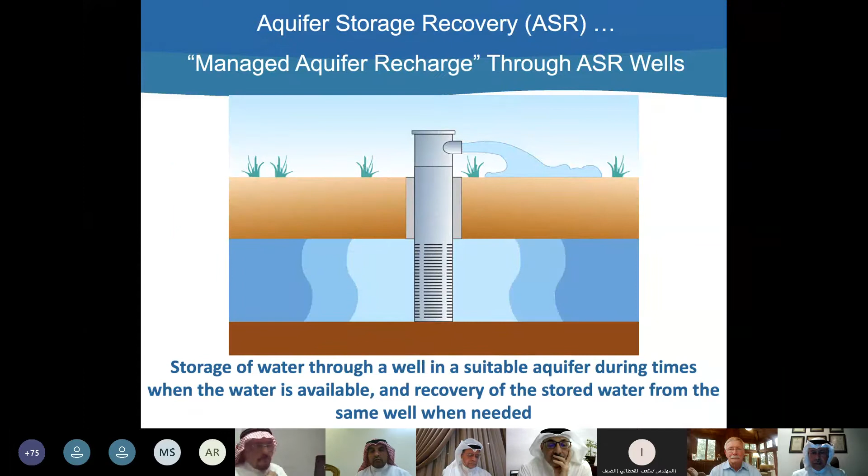Apologies for causing a delay. Not quite sure what happened. Now they're trying to, David, yeah. Yes, now your presentation is there. Okay, David, you can start. David? We can't hear you. Hello, David? David?

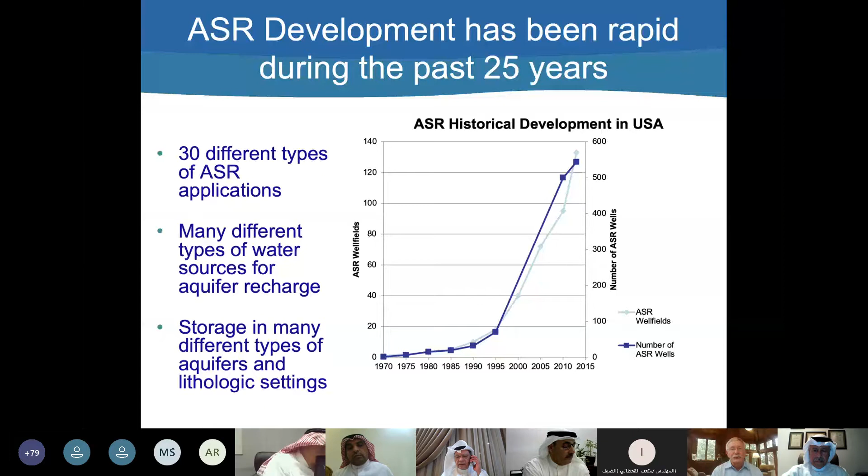So in answer to an earlier question, the pace of ASR development in the United States and around the world has been pretty rapid. You can see the development here over the last 25 years. We've identified over 30 different applications of ASR. We're storing drinking water, reclaimed water, partially treated surface water, and also groundwater from a different aquifer. And we're storing in karst limestone, dolomites, volcanic material, sand and gravel aquifers. We've probably stored water in it. Next slide.

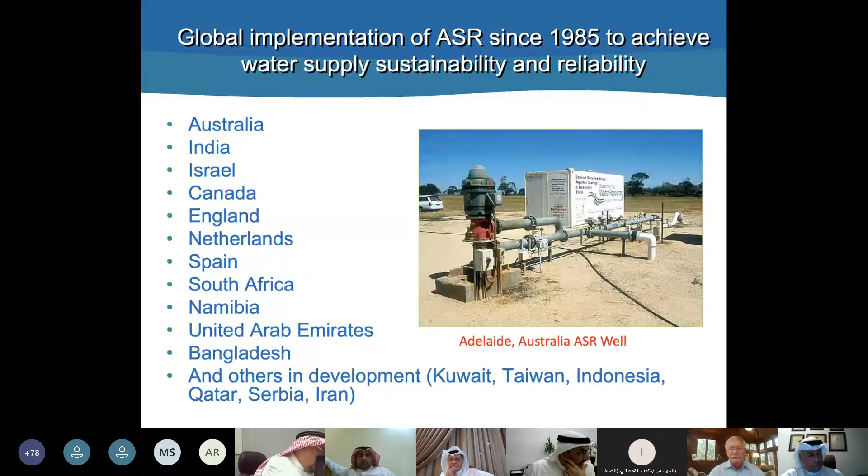It's not just in the United States, it's moved on overseas. So you can see all the countries here that have ASR activity, including in the United Arab Emirates, and others in development right there in Kuwait, and I believe in Qatar and possibly other areas that I'm not familiar with. There's a slide from Adelaide, Australia. Next slide.

So what's driving this? Well, the main driver is economics. Basically, we typically can look at any water supply need or water storage need and develop it with ASR for less than half the cost of alternatives. And in some cases, that cost savings is closer to 90%. We have a lot of different applications of ASR, and it's being applied not just for water supply purposes, but also for environmental and water quality benefits.

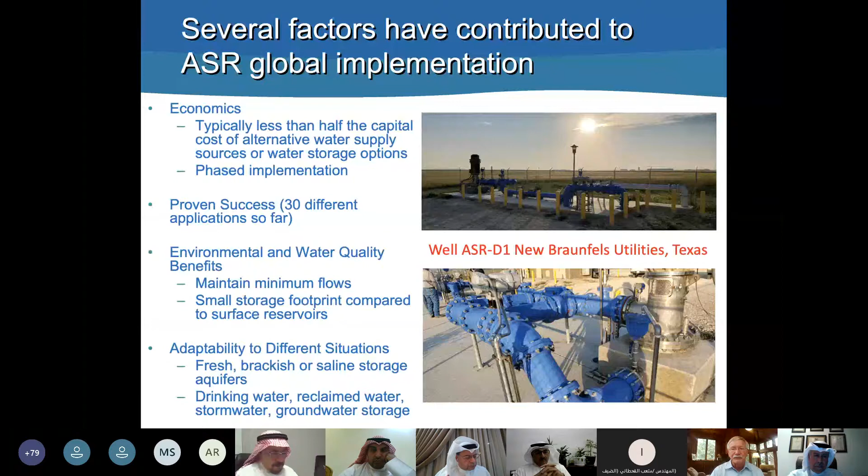Maintaining minimum flows. And one thing is that it's a pretty small footprint. We can put a lot of wells in a hectare of land, as opposed to storing that water above ground. And we're storing in fresh, brackish, and saline aquifers, and as I mentioned earlier, we're storing water from a lot of different types of sources. Next one.

So some of the keys to ASR success are just shown here. Key one is to make sure you start out with a feasibility study. It's a standard format, but a lot of places move ahead with ASR without doing that, and that's a recipe for having problems down the road. Marginal cost water pricing. If you store water during off-peak demand months, the marginal cost of that water is just the cost for the power, the chemicals, and the residuals disposal. So sometimes you can work out or negotiate a half price if you have to purchase the water or produce it, and roll those costs into your economic analysis.

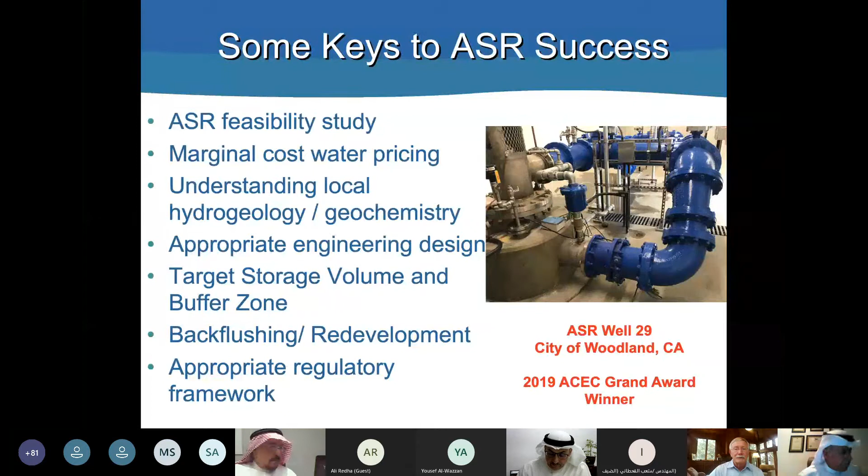You've got to have a good understanding of the local hydrogeology and geochemistry. You've got to have good engineering design. We're going to talk about the target storage volume and the buffer zone, back flushing, and it helps to have a good regulatory framework that matches up with what you're trying to do. Next one.

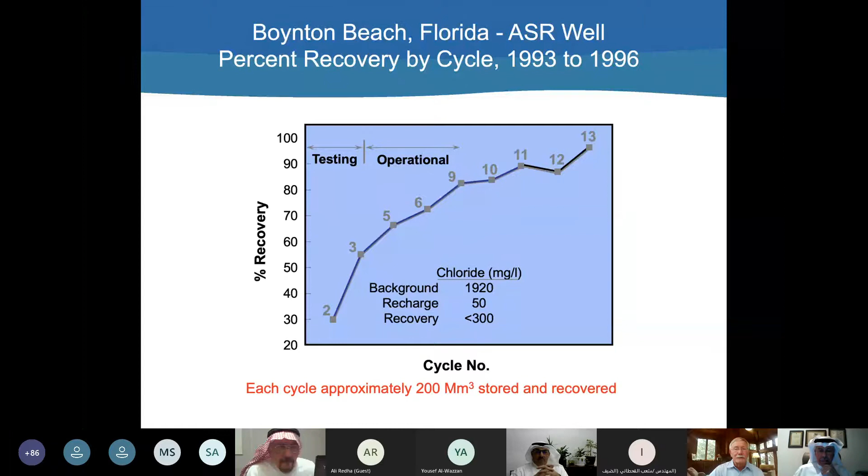Once we form the buffer zone, then we put in water that we plan to recover, either each year or in dry years or whenever. But the buffer zone, you leave intact. You don't want to recover it because you won't like the results. So that's kind of a basic thing for ASR in brackish aquifers, and most of the aquifers you're going to be dealing with in the GCC region are brackish already. Next slide.

This is all limestone. And as a result of that saltwater intrusion, they have had to abandon about half of the wells on the island. And within about 20 years, 40 years, all of the other wells will have been abandoned. So we put in an ASR well in the middle Floridan aquifer down around about 200 meters and

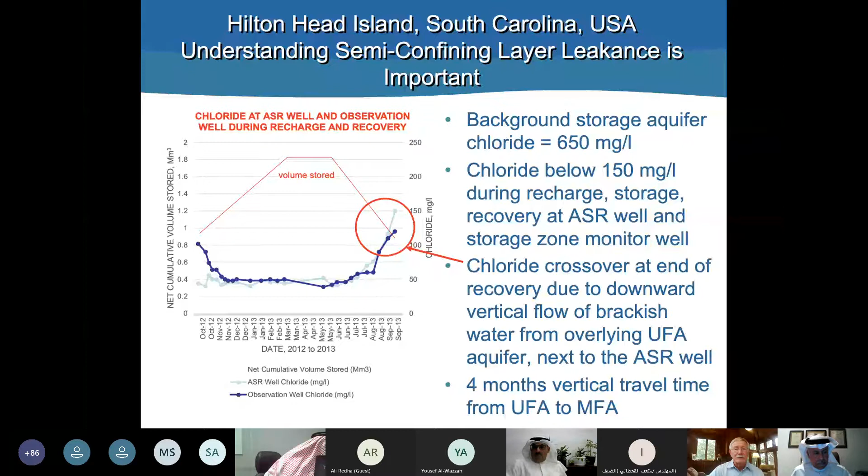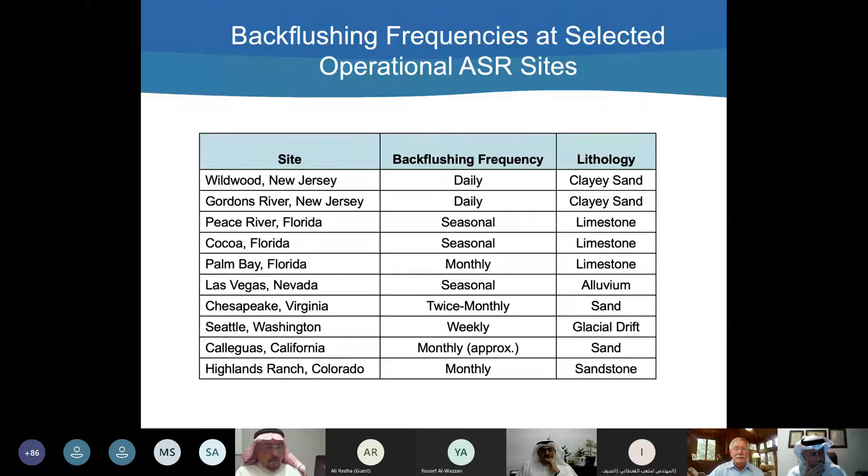Backflushing. We're still developing the procedures and the frequency for backflushing, and it's different at different sites. But you'd be surprised how many folks out there don't realize that if you have an ASR well, you have to design it to periodically backflush it to remove things that are trapped down the well. So this is just showing a number of sites and different types of aquifers and the type of backflushing frequency ranging from daily in a clayey sand aquifer all the way to seasonal in some of these limestone aquifers. Next slide.

And so you could take an area that's maybe 1 or 2 hectares and just put maybe 3 wells and stack the water one on top of the other and have a huge storage volume with a huge recharge and recovery capacity in a very small area. And I think you have that kind of opportunity in parts of the GCC region as well. So that's a very powerful concept, very cost effective. Next slide.

So on this ASR science plan that I mentioned, the draft was issued in October 2020. It should come out sometime in May, June. The peer review panel that assembled the draft was 5 very eminent scientists. 4 of them are geologists and geochemists. 1 of them was a wetland specialist. And so they put this thing together, and several people, including me, have commented on it. So if you check the South Florida Water Management District website around May, June, my guess is you should be able to download that. And that would be a good guide for research on ASR anywhere in the world, I expect.

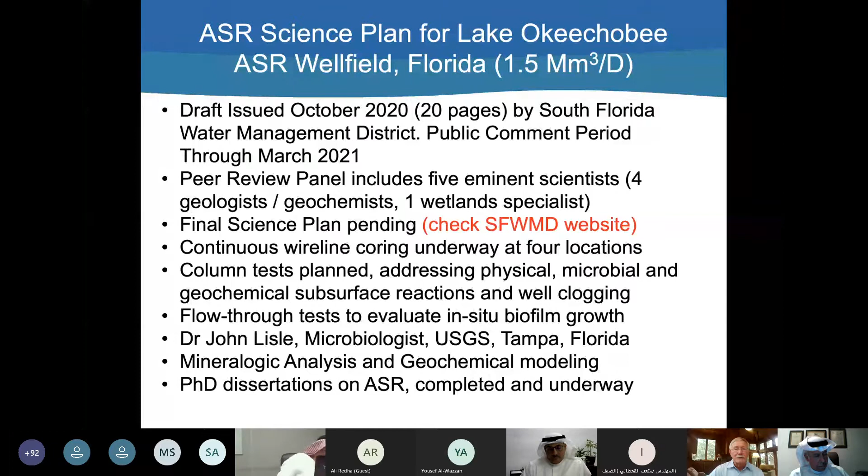Some that come to mind are one from Greg Jones from a few years ago in Florida. I think that Abdulaziz Ali in Riyadh, Saudi Arabia is probably on this call, one of the roughly 100 people. And he completed a PhD dissertation on optimizing ASR well field operations. Christoph Simbo is a PhD graduate student at Colorado State University. He is currently doing a PhD dissertation on ASR geochemistry. There's other PhD dissertations on ASR that I know of come out of the University of London, from Bangladesh, and probably several from Australia. So there's a lot of good work that's been done on ASR research. Next slide.

So future directions, well, there's a lot of exciting stuff that's out there. Regulatory frameworks are steadily being upgraded to match the science and the technology. We're seeing a lot of interest in storing reclaimed water. We have a project going right now, which is an indirect potable reuse project in Southern California, taking wastewater, treating it to the point where you can blend it back into the potable water supply, using ASR as a step in the process. A lot of biotechnology and geochemistry advances are underway.

We're seeing much larger ASR programs being developed or planned. We're seeing ASR developed for strategic water reserves. Quite a bit of interest in marginal cost pricing, negotiating contracts for water purchase using maybe half-cost rates during recharge periods when there's spare treatment capacity. There's a possibility of getting into thermal energy storage. A lot of places are using ASR so that they can recover cooler water during hot summer months and thereby control microbial activity in their distribution systems.

There's opportunities for ASR storage combined with bank filtration and combined with desalination, particularly in the GCC region. I think we're going to see eventually some horizontal directionally drilled ASR wells. The technology is common, it's just never been applied for ASR. We're going to see well pairs and well arrays to achieve storage and treatment in the same location. We talked about vertical stacking of ASR wells and development of concepts for well field protection areas to make sure that your stored water stays safe. Next slide.

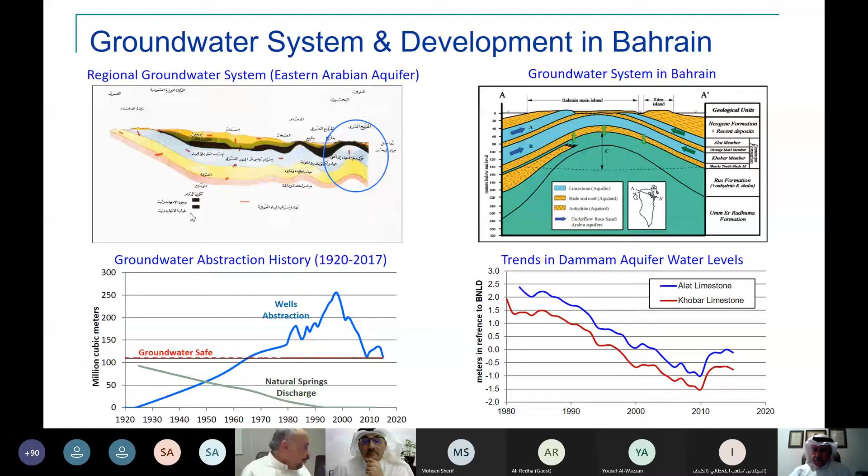We thought that if we can look at where the depressions are that can capture this water, we can either naturally recharge our groundwater system by gravity or by injecting it. This is the whole idea: how to search for the best location in this small island. We have adopted the multi-criteria decision-making process using a GIS system, where we identify criteria conducive to collecting the water and recharging it, and then we rank them, weight them, and validate them.

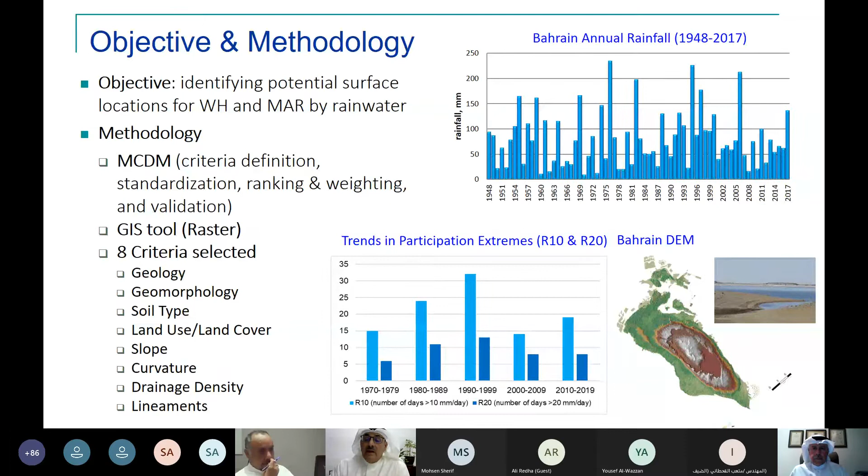And this is what actually we have done. We have the geology, soil types, geomorphology, and land use. These maps already have their ranking and weights in the literature. These are numbers, and we have to reclassify them into classes, then stack them on each other and try to find where the highest number is that we can get from these.

So we found a number of locations that we ranked from optimal to poor. These locations represent where the water will be collected, and then we can use it for recharging the groundwater. This doesn't mean that the groundwater is good or bad there. It's just looking at where the water will be collected if it rains, at least aerially, on Bahrain.

Then we took each one of those locations, optimal, very good, medium and good, and tried to see whether the Al-Nuaimi report, which gathered all the previous experiments or investigations for artificial recharge done ad hoc, agrees with them. And this is what happened: many of our identified locations agree, like Wadi Al-Ahd area, the Doha Road, Safra, Zallaq, and so on.

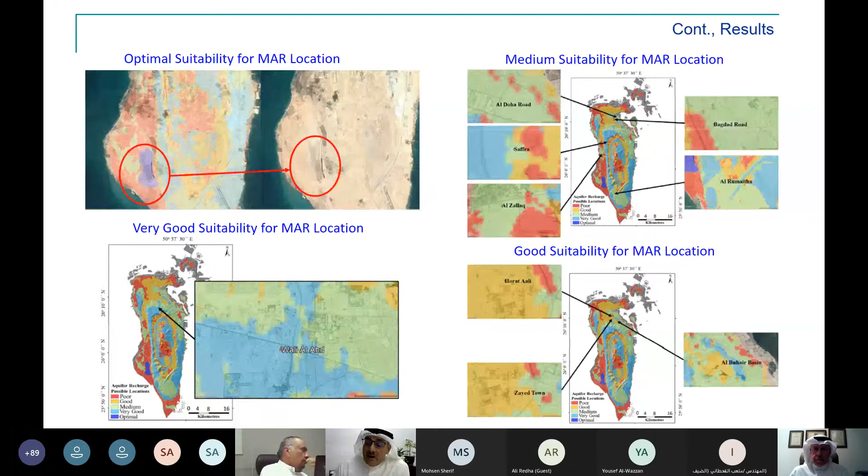After that, we are now going into a deeper stage with higher resolution maps, taking the depth of groundwater and the utilities infrastructure into a much more detailed investigation. If all the criteria meet in terms of infrastructure and depth to groundwater, and after revisiting the satellite images with higher resolution, we will recommend these places for pilot studies and so on.

So this is what I have for you. This is actually the work of one of my students, Ghadir, and she did a very good job, and she should take the credit, not me. Thank you very much.

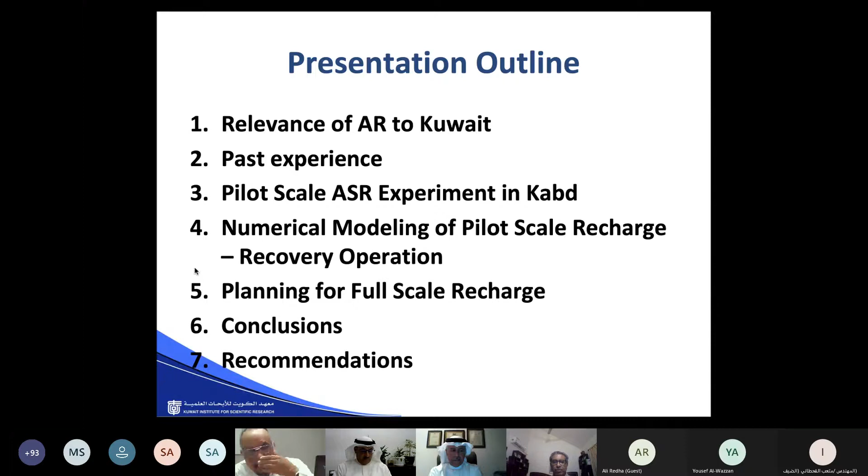Kuwait experience in artificial recharge and its future. The presentation will cover the following points. We'll first discuss the relevance of artificial recharge to Kuwait, then the past experience of artificial recharge in Kuwait, then the recent pilot scale ASR experiment in the Kabd area of Kuwait and its numerical modeling, then planning for full scale artificial recharge in Kuwait, and the conclusions and recommendations. Next, please.

As we all know, Kuwait is an arid country, and except for 2 small fields in the north, Raudhatain and Umm Al-Aish, there is no fresh groundwater in Kuwait. Whatever fresh groundwater is available in these 2 fields will last only about 50 to 55 days with the current consumption. And the brackish groundwater that is present and can be used is also limited in amount and is overexploited.

Kuwait depends mainly on desalination, and in 2018 the installed capacity was about 2.84 million meter cube, and the demand was about 2 million meter cube. So there is a very little gap between the installed capacity and the demand. The available storage can meet demand for about 10 to 11 days only. Next slide, please.

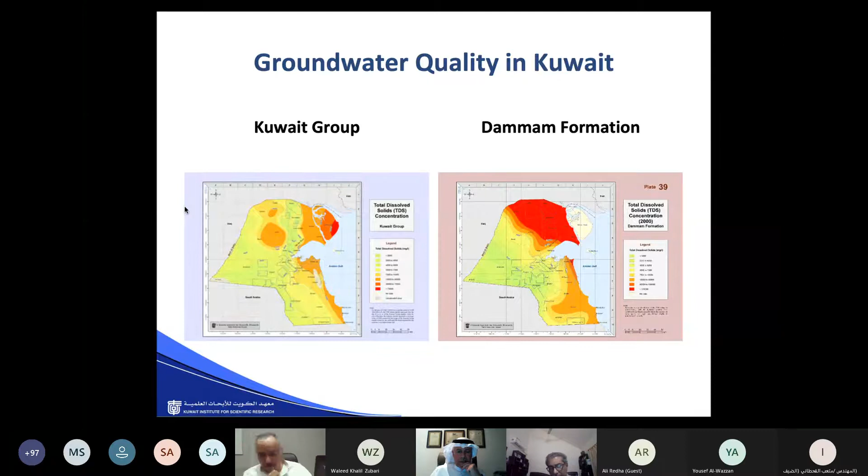Due to continuous production of this brackish groundwater, there is a huge drop in potentiometric head in the southern part of Kuwait. Next slide, please. So artificial recharge can arrest both this drop in potentiometric head and the deterioration in groundwater quality caused by the mining of these aquifers. Also, aquifer storage is free of cost and safe from natural disasters and sabotage.

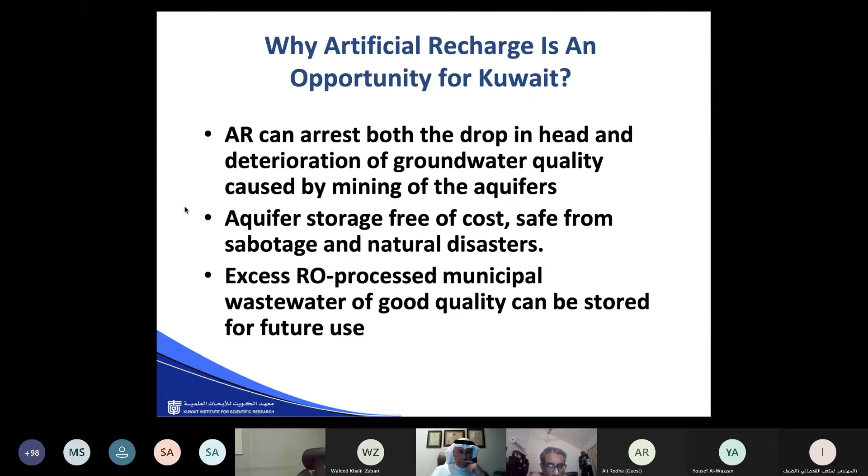And the excess RO processed municipal wastewater of good quality can be stored for future use in this aquifer storage. Currently the installed capacity of RO plants for treated wastewater is about 600,000 meter cube per day, of which a large part will remain unutilized during winter. Further augmentation of desalination capacity will also make available extra fresh water. So all this water can be used for artificial recharge. Next slide, please.

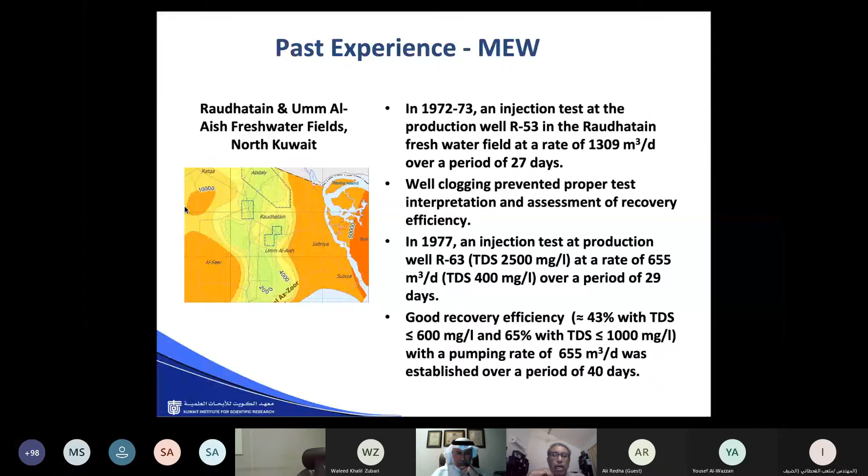Next slide, please. Actually, Kuwait was a pioneer in trying artificial recharge among Middle East countries. Way back in 1972 to 73, an injection test was carried out in the Raudhatain field in the north for 27 days. But due to well clogging, the test had to be abandoned without proper assessment of recovery. Then in 1977, another injection test was carried out in another well, where injection continued for 29 days, and a good recovery was obtained from this well for over 40 days. Next slide, please.

Next slide, please. Yeah. No, sorry, I think you have missed one. Can you go back?

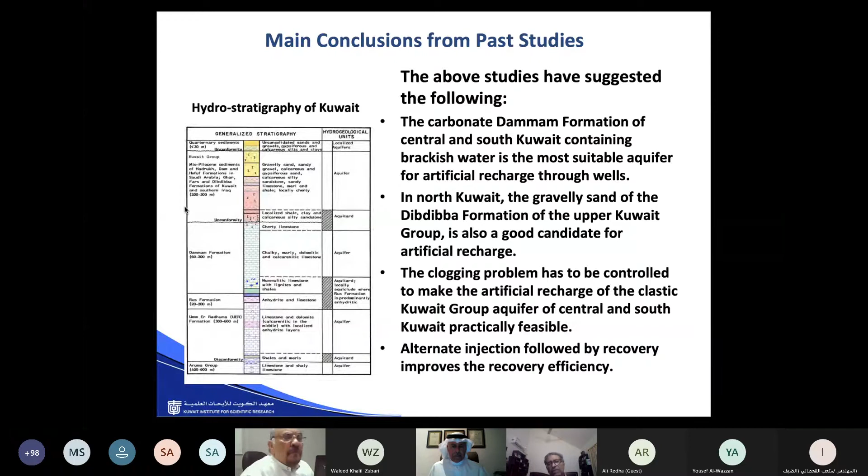So all the above studies indicated that the most suitable aquifer for artificial recharge in Kuwait is the Dammam Formation aquifer in the central and southern part of Kuwait, where the groundwater is brackish. In North Kuwait, the gravelly sand of the Dibdibba Formation will be the best candidate for artificial recharge. However, for the Kuwait group in the central and southern part of Kuwait, clogging is a big problem, and that has to be controlled to get any meaningful success in artificial recharge in this aquifer. Next slide, please.

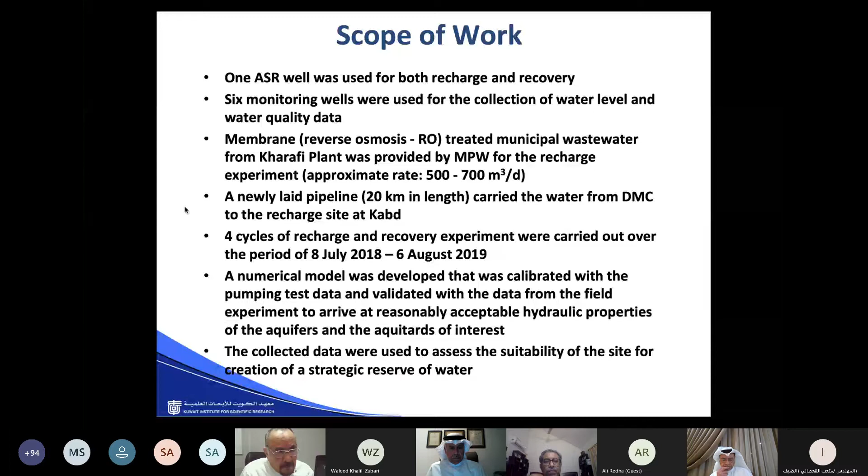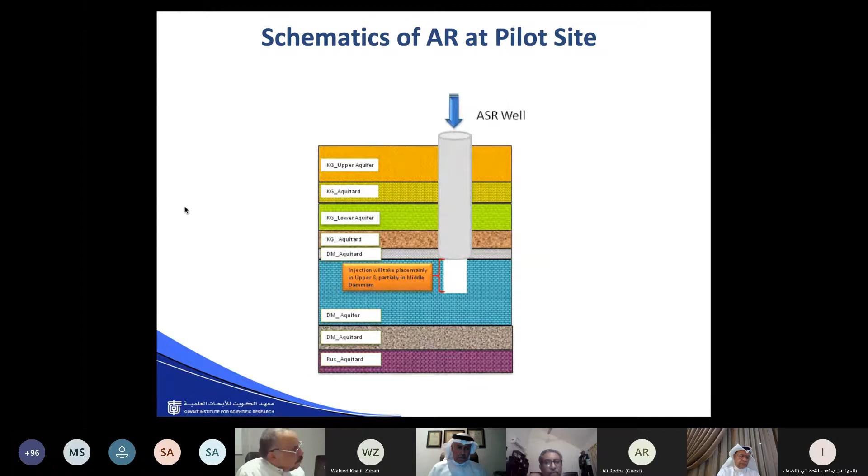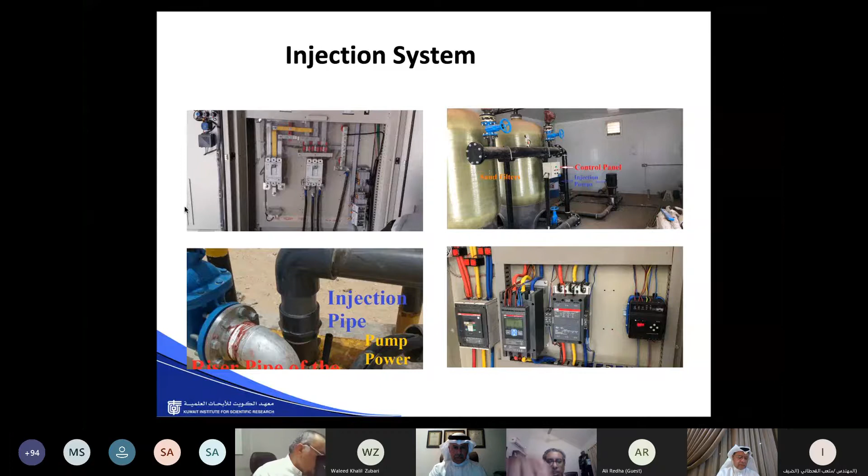This is the arrangement at the well site for injection. You can see the electrical connections, the filter at the site through which the injection water will pass to remove the suspended solids, and then the wellhead injection pipe which is going to the wellhead. Next slide, please.

This table gives a summary of the 4 cycles of injection, recharge and recovery. In a nutshell, the first cycle was roughly 1 month of injection and 1 month of recovery, and this first cycle was the easiest. There was not much of a problem. Second cycle,

we tried to inject for a longer time, so instead of 1 month, about 1.5 months, at the same rate as the first one, so that we can inject more water, and then we tried to recover the same water. Of course, there was some problem during this recovery. There was a huge rain shower during this recovery, so everything was flooded.

The site was flooded, and we had electrical failure. The pump stopped, so it took a long time to go back to the site. We could not even approach the site. It was all covered with water. So after about 2-3 weeks, we could enter the site and we started the operation. So there was some problem at that site at that time. But anyway, we completed the work in a somewhat longer time.

And then the third cycle, we tried to inject at a somewhat higher rate than the first 2 cycles. The injection was okay. There was some interruption due to power failure, and the recovery was also okay, though there were some interruptions. We tried to recover at a slightly higher rate than the injection rate, to see what is the effect of that on the recovery.

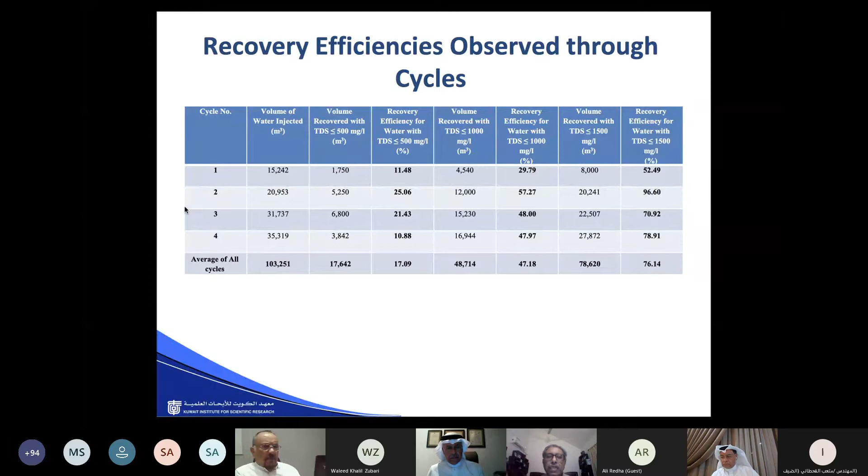Okay, so this is the tabulation of the recovery efficiencies during these 4 cycles. Next slide, please. Graphically, it will be better. Okay, you can see graphically that as we go from the first to second cycle, as expected, our recovery percentage increases. But in the third cycle, there is a drop.

There was a drop, and when we analyzed the data, we felt it was because we increased the pumping rate during the recovery, and this caused the upconing of the more saline water from the bottom of the aquifer, because we did not cover the whole aquifer for recharge, and that caused the lowering of the recovery.

In the fourth cycle, we more or less maintained the injection and recovery rate at the same rate. We had some improvement in the recovery, but because there was a 2 months gap between the recharge and recovery, much of the water shifted from the injection well down the hydraulic gradient, and that lowered the recovery.

So this problem has to be taken into account when we create a strategic reserve for water, so that we somehow find a way to keep the water in its place so that it does not get lost. Next slide, please.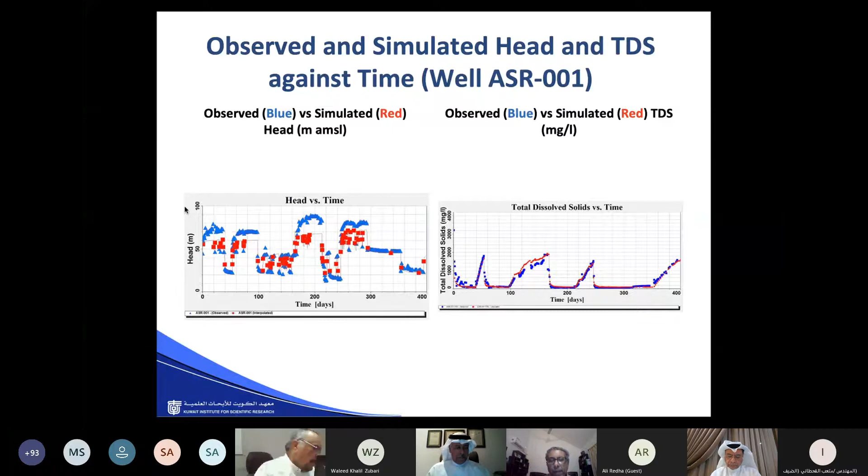You can see the red is the simulated data and blue is the actual observed data. The difference between the simulated and the observed data in the ASR well during the injection is due to clogging. Because of clogging, the observed potentiometric head was higher than the simulated head. But there was a very good match with the quality. And in the monitoring well, there was no problem. We got a very good match between the observed and the simulated data, both for potentiometric head and for quality.

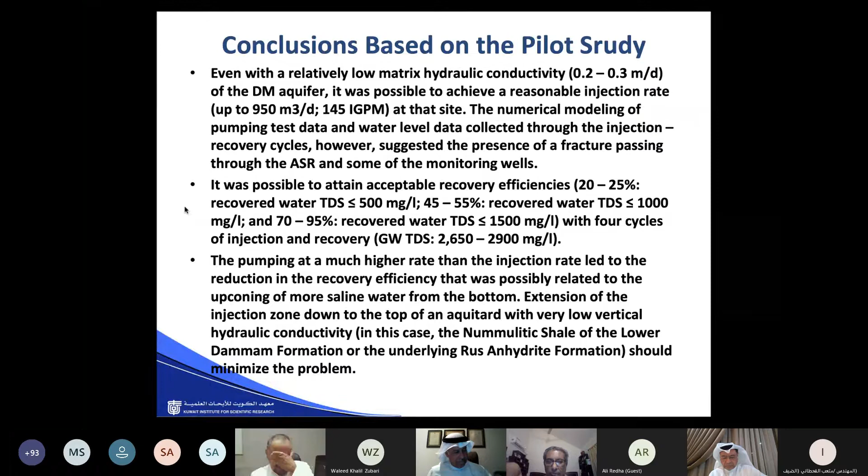Next slide. Okay. Now, MEW already planned a recharge site almost next to our pilot research site, and they had a plan for about 57 to 60 wells in this area. So, the plan was that 25 million imperial gallons per day of water will be injected to 57 wells, and injection will be at the approximate rate of 300 imperial gallons per minute or 2000 cubic meters per day per well for a period of 10 years.

And the reserves so created will be used to cover an emergency which may last for 6 to 12 months, and which will meet the requirement of 1.5 million to 2 million people at the rate of 30 liters per day per capita for this population. We started to set up a numerical model in this area to find out the best well arrangement and the recharge recovery rates to meet this goal. Next slide, please.

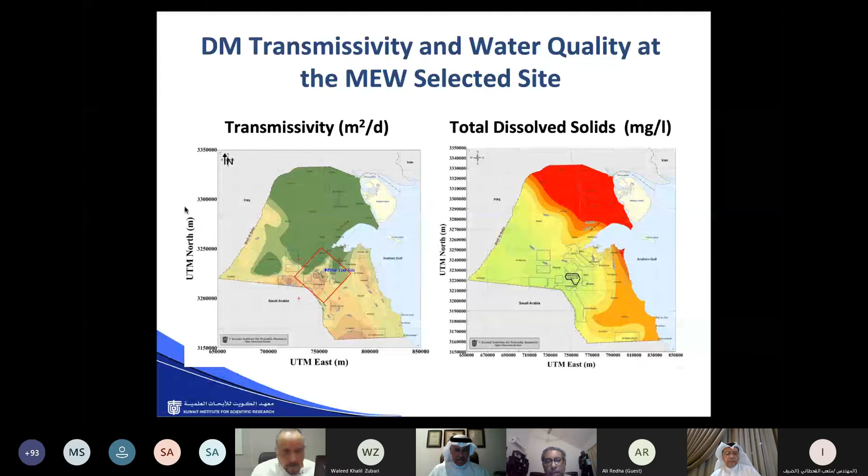And this is the original plan of MEW for the well arrangement. Next slide, please. And this shows the transmissivity in the area was about 500 to 1000 square meters per day, and the total dissolved salt content is in the range of 3000 milligrams per liter. For the next slide, please.

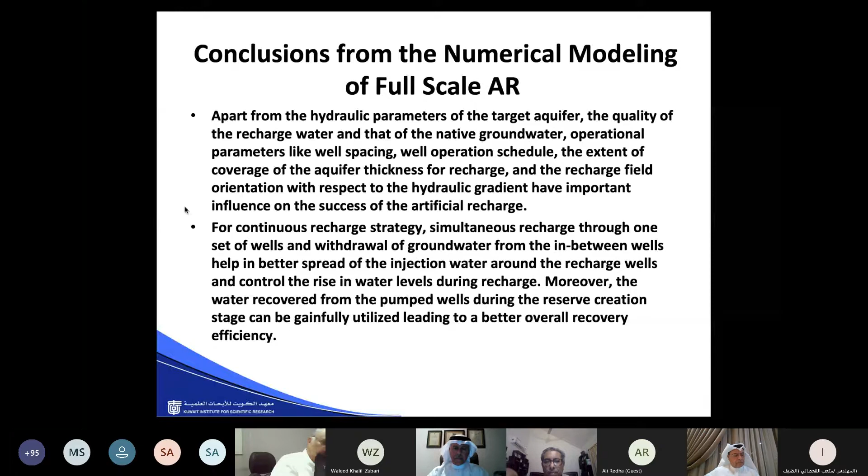Yeah, so ultimately it was recommended that instead of the original plan, the trend of the AR field should be perpendicular to the potentiometric gradient in the area, it should be more compact, and injection should be for 5 years continuously.

And then once the reserve is created, it should be maintained by maintaining injection at the same rate as the flow of the water out of the recharge field along the hydraulic gradient, so that the storage that is created remains at this site, and it can be used whenever there is an emergency.

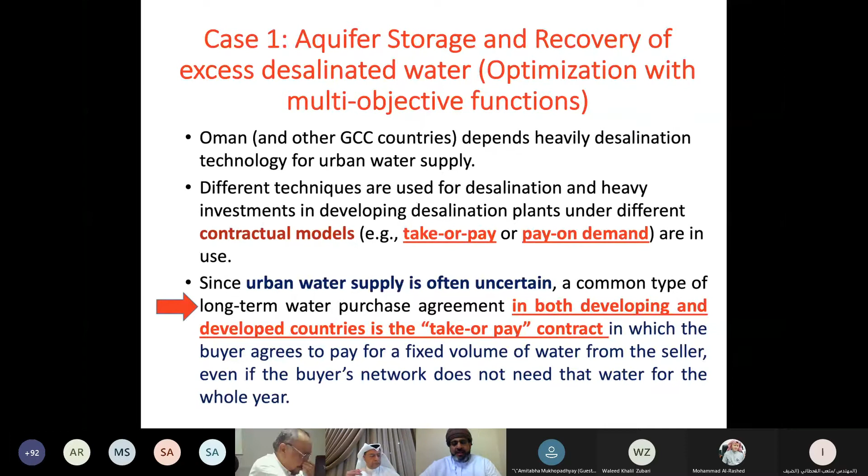That is the case we are presenting here, because during the low peak demand duration, identified as November, December, all the way to February, there is a surplus of desalinated water. It has to be produced anyway, at least the minimum, and the authority has to pay for that. So instead of discharging that water somewhere, why not bank it in the aquifer and recover it later on?

Next, please. Next. Okay, no, just go back one slide.

So the aquifer system is located in Muscat, and as I said, the low demand period is November to February. Currently the authority has no choice other than discharging the excess produced water, around 10 million cubic meters, to the sea. However, the authority still has to pay 85% of the cost, even if production is stopped. So the main objective: can we optimize the use of this desalinated water, bank it into the ground and pump it back in summertime? Next, please.

So our work estimates the benefits by using the optimal conjunctive use of the groundwater and desalinated water by this seasonal recharge. We did that by coupling the numerical flow simulation with a dynamic multi-objective optimization model. What we have in place is 45 existing wells used by the authority to abstract water to the grid. Then we would like to get how many wells we have to add for injection and recovery for an optimum condition that can accommodate the excess desalinated water.

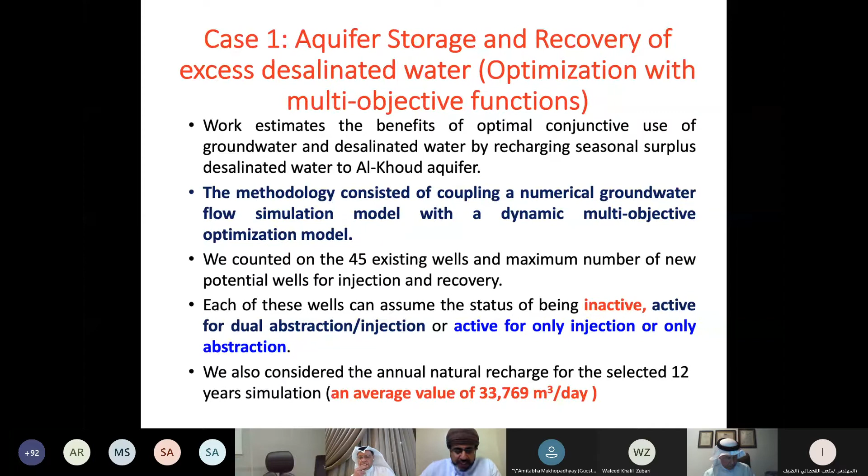Those 45 wells plus the new suggested wells, according to the optimization, could be inactive, could be active for abstraction and injection, could be active for only injection, or could be active for abstraction. So not all of them will always be either injection or recovery. It depends on their location. It depends on the constraints that we are going to put. Next, please.

Before I start the slide, the last point in the previous slide was that we accommodated in our calculation the natural recharge of the groundwater as well, which was estimated around 33,000 cubic meters a day for the simulation period of 12 years. Now, the objective functions in our optimization approach here are the value of the groundwater and minimizing freshwater loss to the sea, because if we inject the high value water into the ground, we cannot stop losing part of this water to the sea since we are dealing with a coastal aquifer, but we have to minimize that.

And then the cost of the desalinated water, and finally, we have to analyze and include the cost of drilling the new wells. Next, please.

The constraints were the total groundwater abstraction volume, the total volume of water allowed or affordable to be lost to the sea, the volume of injected desalinated water, the cost of injection of the water, and the depth of the rising water table, because the aquifer is situated in an urban area, and if we allow the water table to mount close to the surface, that might induce damage to the infrastructure. So we have a limit not allowing the injection to bring the water table closer than 7 meters from the surface.

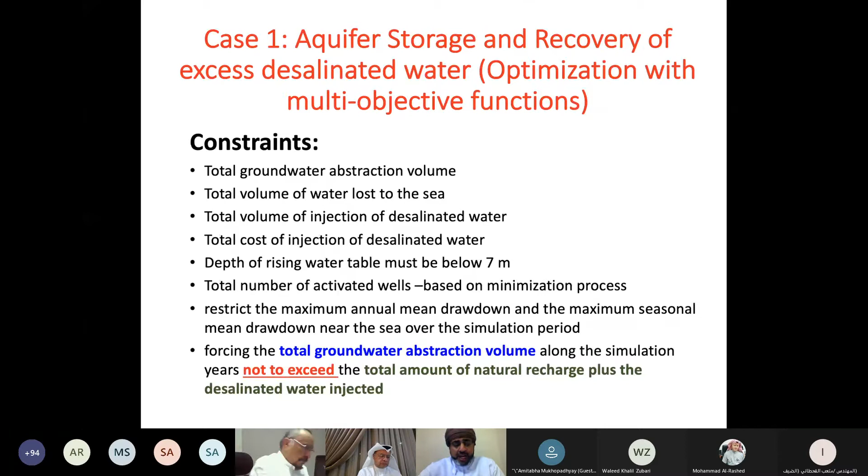And then minimizing the cost of activating wells. We also have to minimize the annual mean drawdown, especially close to the sea. And we have to force that the total allowable abstraction volume should not exceed the total amount of natural recharge plus the desalinated water injected into the aquifer. Next, please.

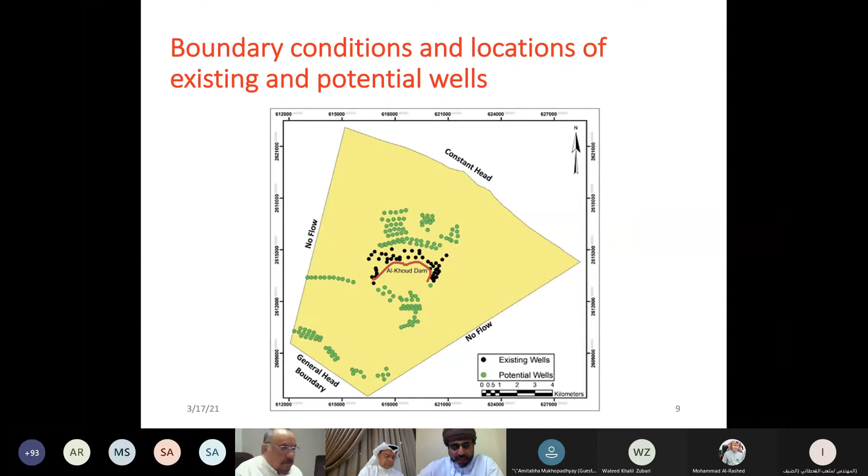And we accounted here for the optimization and for the economic feasibility of the task. We accounted for the cost of desalination, injection, energy, the value of the groundwater, and all of the associated costs with the ASR system. Next, please.

Okay, so the results show the optimal status of the existing wells and the potential wells. As you can see, there are wells of different functions. Some of them, for the optimal condition, should remain inactive. Others should be active for dual actions like injection and recovery, other wells only for abstraction, and others for injection. Next, please.

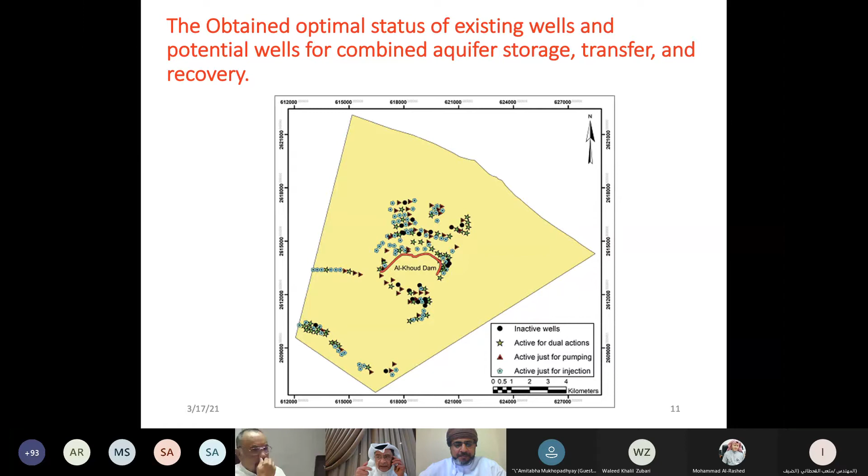So the main outcome of this study: a lot of analysis has been done, and the work is published in a couple of papers. I will be very happy to share it. The results of the study show that increasing the number of wells from 45 to 173 will allow storing up to 31 million cubic meters a year of excess desalinated water into the aquifer and allow recovering during summer.

We have not done the recovery efficiency, in fact. But the net benefit of that exercise will be around $55 million a year, while the cost of drilling the new wells is only around $5 million.

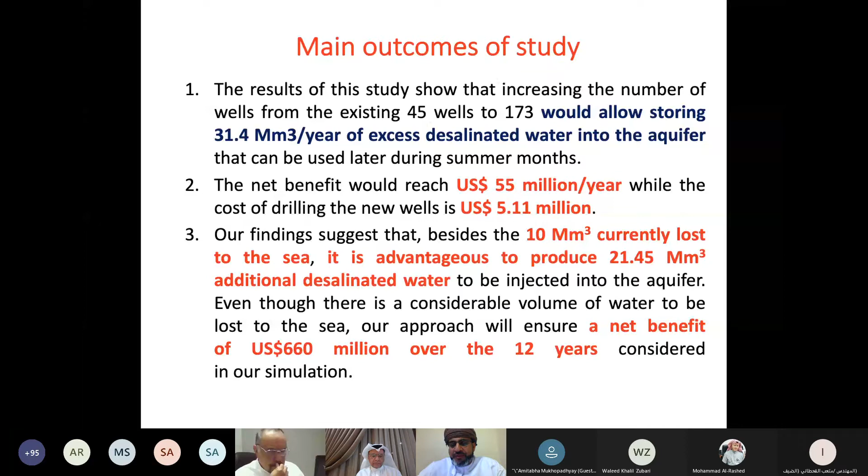The findings also suggest, besides the 10 million cubic meters currently lost or unused, it is advantageous to produce 21.4 million cubic meters of additional desalinated water as per the contract to be injected into the aquifer. Even though some amount of water will be lost to the sea, still the net benefit will be $660 million over the 12 years of the simulation period. So this was the feasibility study of banking excess desalinated water in the first case.

Now I will move to the second case, which is a real project in Salalah. I am just presenting highlights of this project as collected from different publications and technical reports. Salalah is located in the south part of the country. It's a very nice place. There was an STP in Salalah by the time the project was started with a capacity of 20,000 cubic meters per day. It is not much, but I'm quite sure now it is much higher than that.

The MAR system was designed to inject 18,000 cubic meters per day at that time. The Salalah coastal strip was heavily utilized by farming activities. The main purpose of this MAR is to create a hydraulic barrier along the coastal zone to decelerate seawater intrusion, and then to augment aquifer water storage and decelerate deterioration of the quality. And definitely, instead of getting rid of the treated wastewater, it's better to store it in the ground and maximize the use of it. Next.

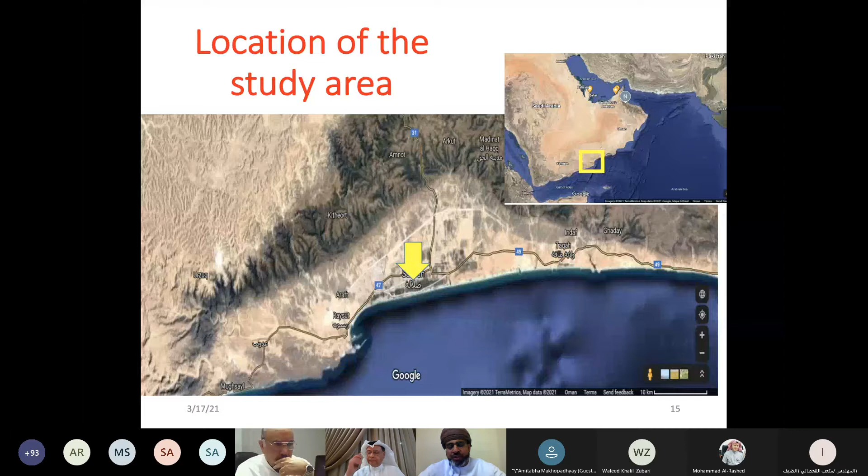This is the study area in the south of Oman, and this big yellow arrow indicates the project area. You can see the mountains in the back. So Salalah is a very nice coastal strip, and it is sheltered by mountains from the north, east and west of the strip. Please go next.

Okay. So the injection started in April 2003 through 40 injection wells. They are 300 meters apart from each other. And there were another 40 observation wells in the vicinity of the injection wells, within 5 meters. The injection line, as you will see in the next slide, is 1 to 2 kilometers from the Arabian seashore, and we have to keep this information in mind.

The wells are constructed to a depth of 48 meters below the ground. So they penetrate 2 main aquifer systems, the Quaternary alluvium and also the Adawnib formation. Next, please.

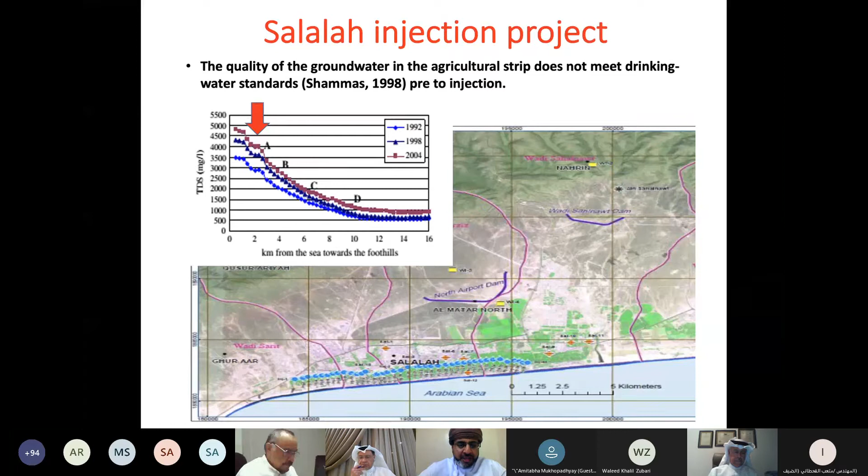Next, please. So the targeted formation, as I said, is the Quaternary and the Adawnib formation, 30 to 45 meters thick, and the water table is within 2.5 to 7.5 meters in the injection line. We have to keep this in mind, because under injection we have to optimize the rate, otherwise the water table might rise to the surface.

The most permeable horizon is the Blade member, which is a weakly cemented limestone with a porosity of 35%. The aquifer is quite transmissive, around 2,500 square meters per day, and about 6.5 million cubic meters a year of treated effluent will be injected. And we have to ask ourselves: to achieve the stated goal, is this volume optimum to achieve the planned objective?

Definitely this injected water is below drinking water standards, so it is injected in an agricultural area where there are no public wells. The aquifer in general has a deficit of 7.6 million cubic meters, expected to be 21 million cubic meters a year by 2020, which is almost now. So that is why MAR was thought to be needed, using treated wastewater or any water available at that time to augment the water resources and decelerate this deterioration and depletion.

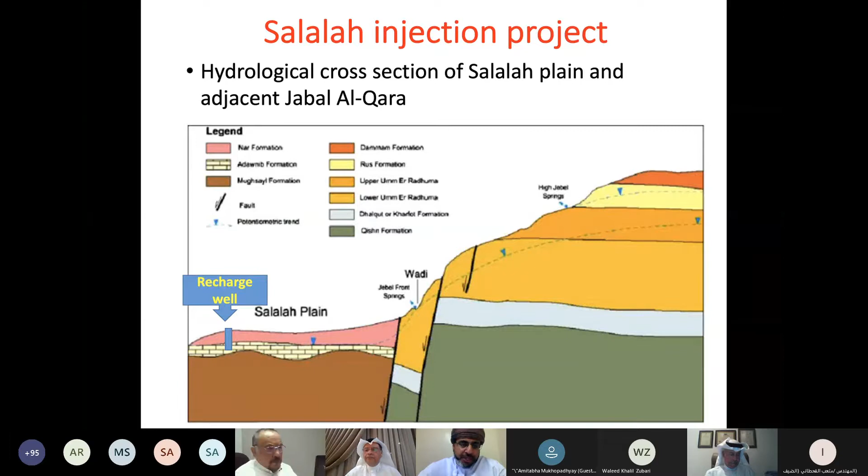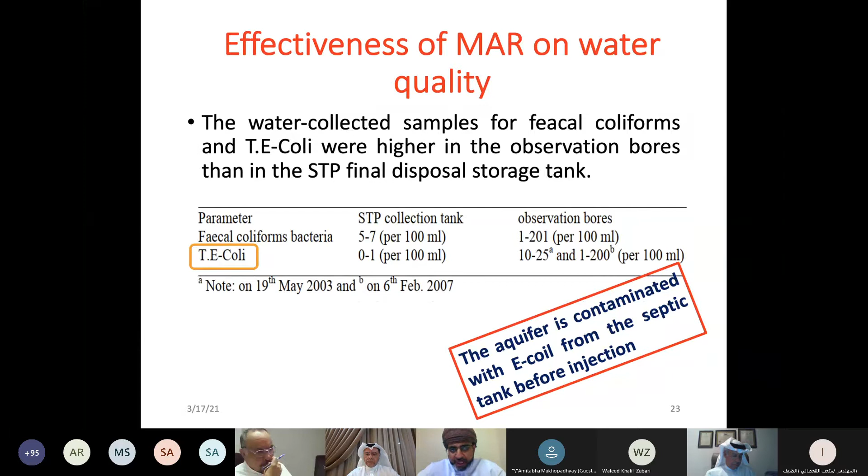So the Salalah MAR project contributed to improvement of the deteriorated aquifer. However, uncontrolled abstraction later on affected its effectiveness and in fact created worries about this MAR system being expanded in the country. And now luckily we are coming back in line and soon we'll start our main ASR system. So excellent understanding of the hydrology is important. As I said, optimum location: is the injection line stated in the project the optimum?

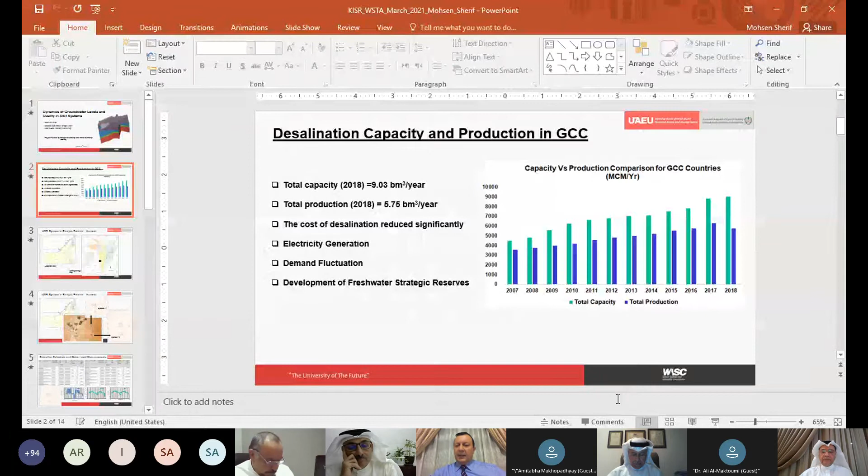As you know, in the GCC countries, the production of desalination is among the highest in the world. The total capacity by the year 2018 was 9 billion meter cube per year. However, the total production was around 5.75. Of course, now the total production may have reached like 10 billion meter cube per year. As mentioned by our colleagues, there is always some time in the year where you have excess of desalination water, and this water can be utilized in injection of the aquifers.

In this presentation, I am going to focus specifically on the dynamics of groundwater levels and salinity. This project is located in an area which is called Nazwa area in the Emirate of Sharjah. The location was selected based on the suitability of the site in terms of the hydraulic conductivity, the transmissivity of the aquifer, the hydraulic gradient, and so on.

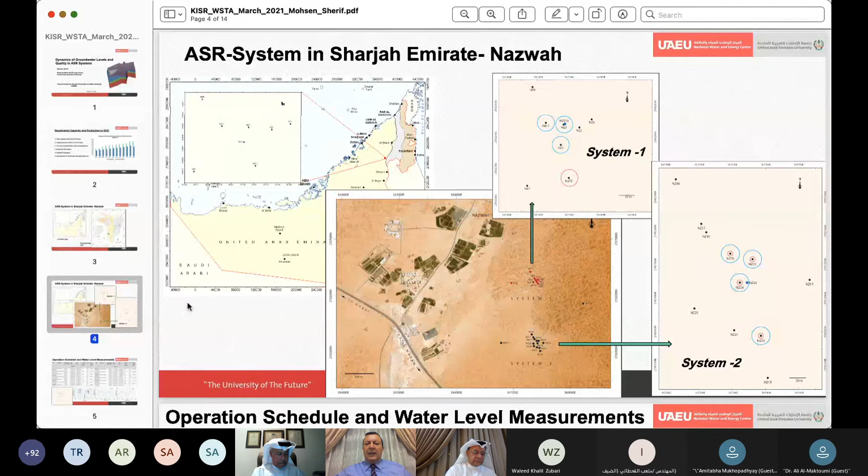Here it is. Okay. So as I mentioned, we have two systems, system number one and system number two. Each one includes an injection well, a recovery well, and a number of observation wells. The full data for the operation of the system, yes, this slide please.

As we start the injection, there will be a very sharp increase in the groundwater level. And once we stop the injection, there will be a decrease in the groundwater level. And when you start the recovery, because after the injection we allow for a storage period, like 30 days, and then recovery, there is a sharp drop in the groundwater level. And then after recovery, once you start the injection again, there will be a significant increase in the water level.

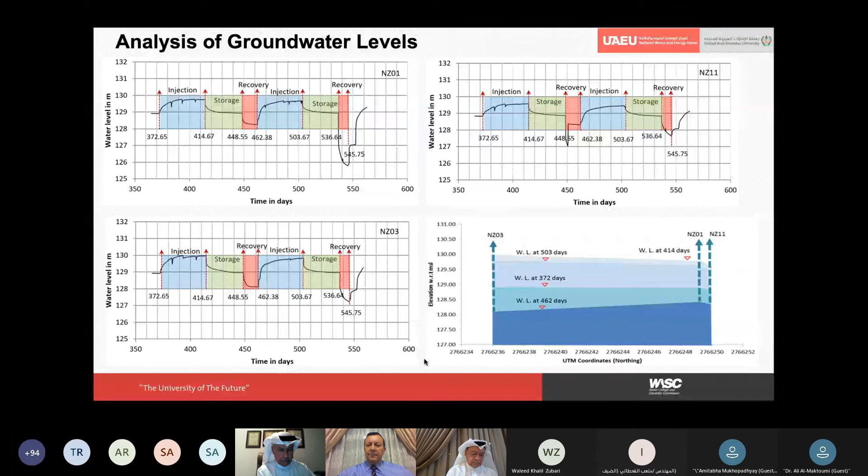The good part is that we can develop correlation between the observation wells. We have 9 observation wells in system number 1 and 13 observation wells in system number 2. So you can develop correlation between all the wells, and the water level can be predicted at the different locations in the ASR system by developing this correlation. Again, the same trend is observed in all observation wells as well as in the injection well.

The main difference is that if you have a fluctuation in the injection well of like 10 meters, then in the observation wells the fluctuation would be like 3 meters, 2 meters, 1 meter, depending on the distance of the observation well from the injection well. Next, please.

This is the numerical simulation for this exercise. We used MODFLOW, and as you can see, the mesh, as indicated also by Amit from KISR, at the location of the two systems, system number 1 and system number 2, we use a very, very fine grid system in order to capture the variation in the water level and salinity in the two systems.

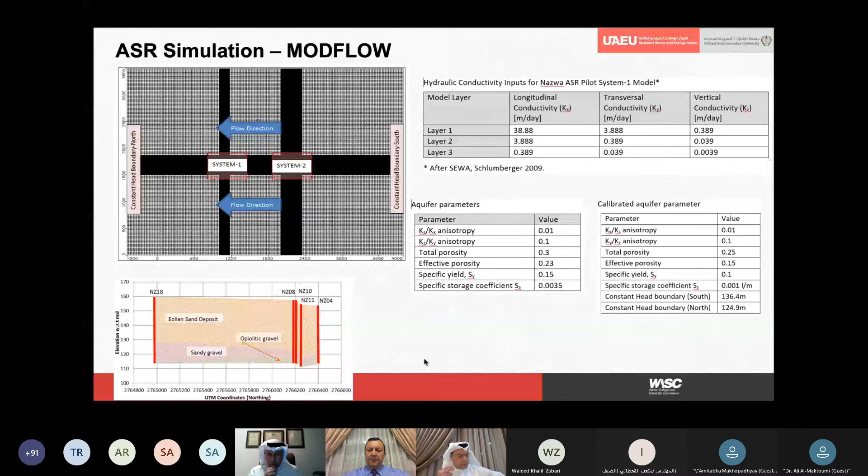The aquifer is composed of 3 layers, layer number 1, 2 and 3, and the 3 layers have different hydraulic parameters, as can be seen here. Also, the hydraulic conductivity and anisotropy of the system. Of course, we have done calibration for the hydraulic parameters, and you can see the calibrated hydraulic parameters of the aquifer system. Next, please.

The fluctuation in the injection well itself and recovery well would be very high and instantaneous with any variation in the amount of pumping, the volume of pumping, the pump itself, and therefore it is really difficult to predict the water levels in the well itself. Next.

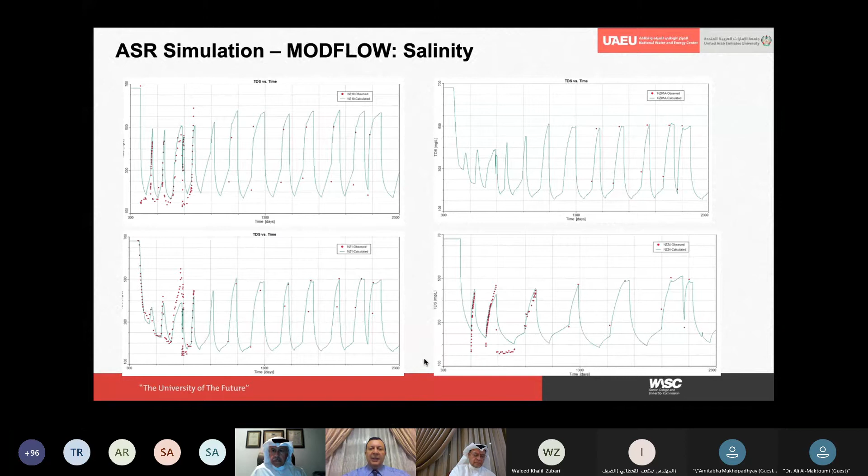The same was observed with the salinity. The salinity would fluctuate; it will increase once you start recovery, and because we are using desalinated water, the salinity will decrease significantly once you start injection. Again, the model was capable of simulating the salinity much better in the observation wells as compared to the injection and recovery wells. Next.

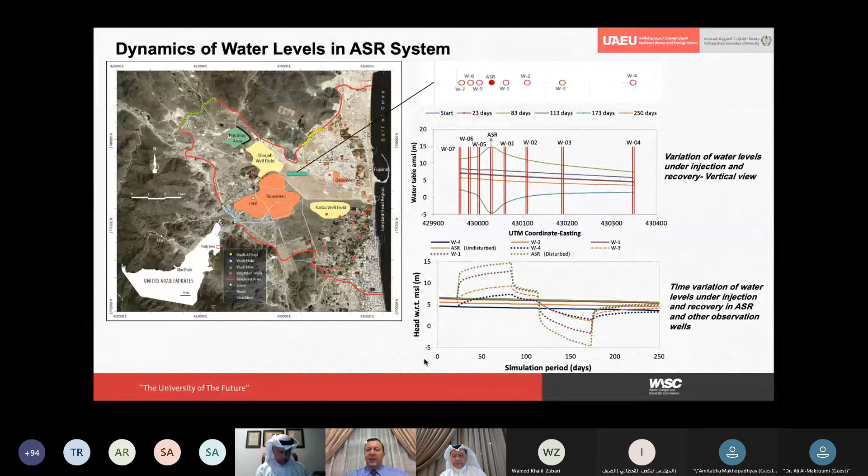This is the good part about it, that the trend again is the same. If you have a homogeneous and isotropic aquifer system, then the trend in the observation wells and the injection well would be almost the same, but of course with different values. Next slide.

And this is the last slide, just the conclusion. So in the GCC countries, the ASR systems would provide a feasible option for the storage of the excess of water, specifically desalinated water, because in the GCC countries, not all GCC countries, but this is applicable perhaps in United Arab Emirates, in Saudi Arabia and Kuwait, where huge amounts of desalinated water are produced. So this ASR system would be a feasible solution.

The ASR systems cannot be duplicated, as I mentioned, because each site has its own characteristics and the operation parameters are different from one site to the other. And of course, the feasibility study and the geological, hydrogeological, and hydrochemistry studies are essential in order to have a

successful system. And for the numerical simulation, it is better to use variable density flow models in order to capture the variation in the salinity between the injected and native groundwater that is available in the aquifer system.

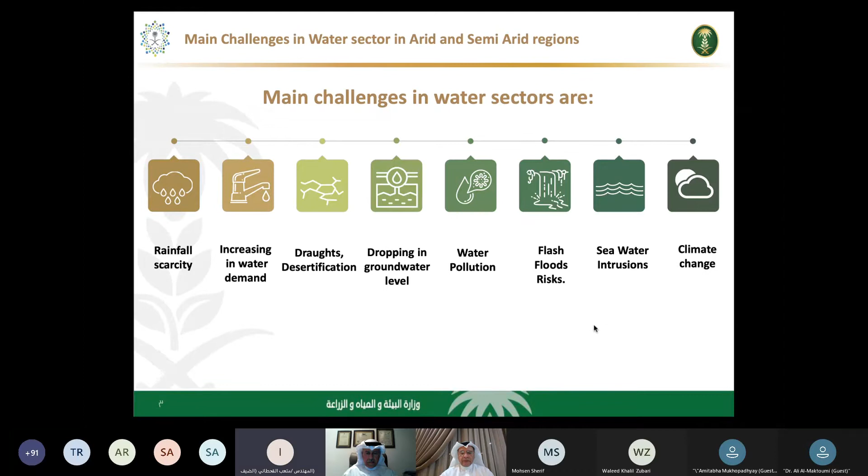Please give me control from my side. You have to go back, but just say next, and we'll change it for you. Next, please. Go ahead.

It is known that artificial injection and groundwater recharge is one of the initiatives of the National Water Strategy and Vision 2030. This is included in initiative program number 3, the initiative to expand the capacity of water storage, including aquifer recharge, ground storage and water recovery. Next, please. This is an introduction, definition, and injection wells.

Why artificial injection? Advantages of artificial injection. Artificial injection does not only have advantages; there are also disadvantages, because there may be some interaction between the injected water and the recovered water through the soil, high cost in some cases, or some clogging of the aquifer may occur during operation. Next, please.

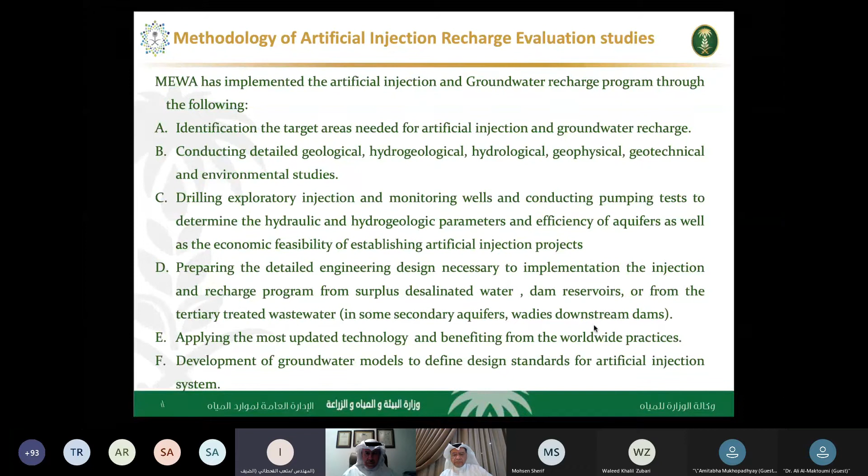Artificial injection and groundwater recharge in Saudi Arabia have 4 programs. The first program, as an engineering method, is direct injection using desalinated water within the target aquifer, or storing it in the dam reservoir as in Rabigh and Marwani. We will discuss each program in detail.

The second program is injection using runoff water retained in dam reservoirs. We have subclasses for this: either drilling injection wells inside the dam reservoir, drilling injection wells in the alluvium downstream of the dams, or recharging the groundwater by opening the dam gates and releasing water downstream. We have a good example in Wadi Hali in the Makkah region.

The fourth subclass is ground recharge by establishing a water supply system consisting of a surface dam, an underground dam with well fields in between, and purification plants. The third program is recharge through sinkholes and cavities, with more than about 2,000 sinkholes scattered in Saudi Arabia. The fourth program is direct injection using tertiary treated wastewater, as planned in the Khulais and Asfan plains, Makkah region. Next, please.

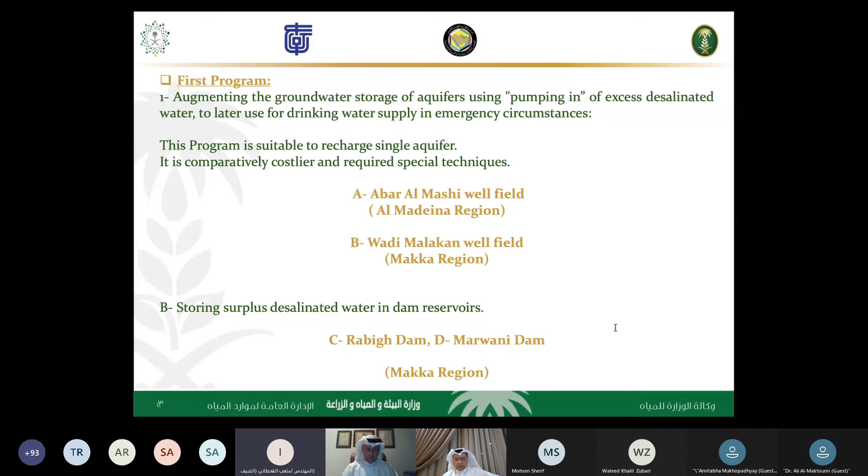This is the first program, direct injection using surplus desalinated water in Abar al-Mashi, a drinking water supply in the Al-Madina al-Munawwara region. It has two main fields, the southern and the northern field. The northern field is the target field, consisting of 250 wells. The drop in the water level is about 0.8 to 0.9 meter per year, corresponding to more than 100 million cubic meters.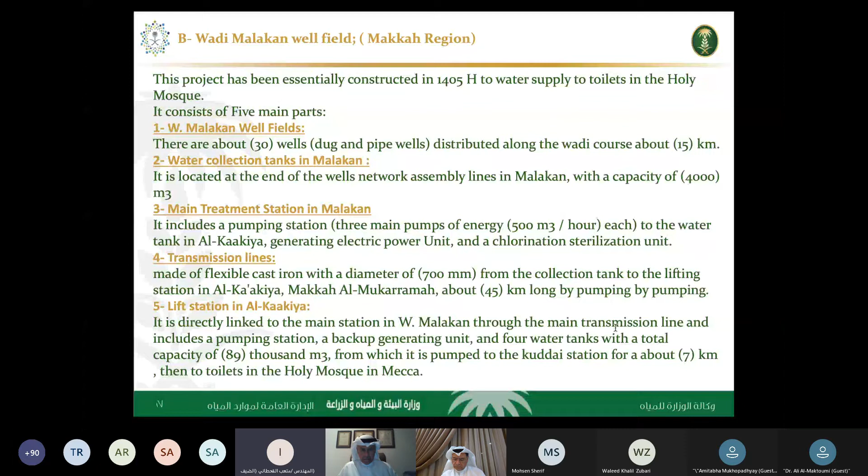The Wadi Malakan well field has more than 30 productive dug and pipe wells distributed over about 15 kilometers of the wadi. The second part, water collection tanks in Malakan with 4,000 cubic meter capacity, the main treatment station in Malakan, then the transmission line of more than 45 kilometers from Malakan to Al-Kaakiya in Makkah al-Mukarramah, a lift station in Al-Kaakiya, and water from Malakan directly to Arafat for about 7 kilometers. The catchment area of Wadi Malakan is more than 2,000 square kilometers.

This is a diagrammatic sketch: this is Shaiba, and to the south, the blue line continues to Malakan, which will feed Al-Kaakiya through Al-Khalil Ibrahim road, with lifting for Arafat. Next, please.

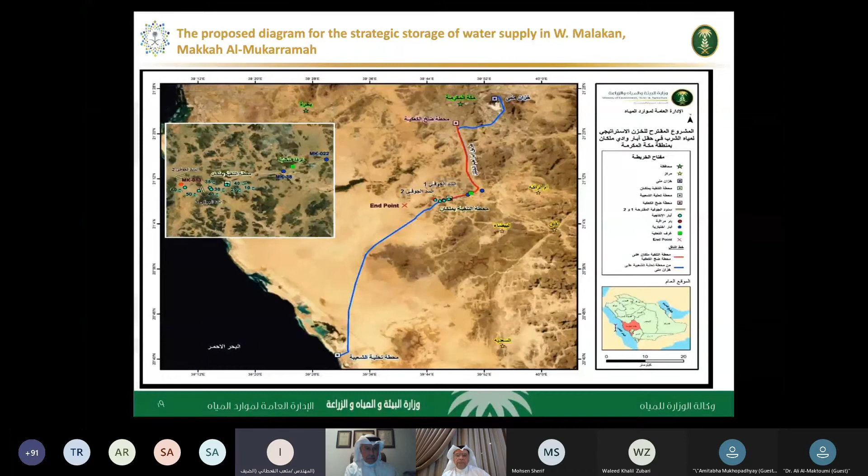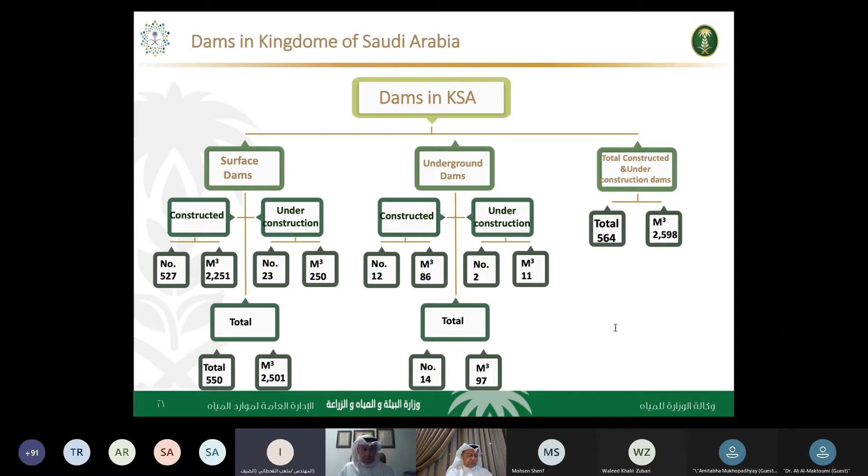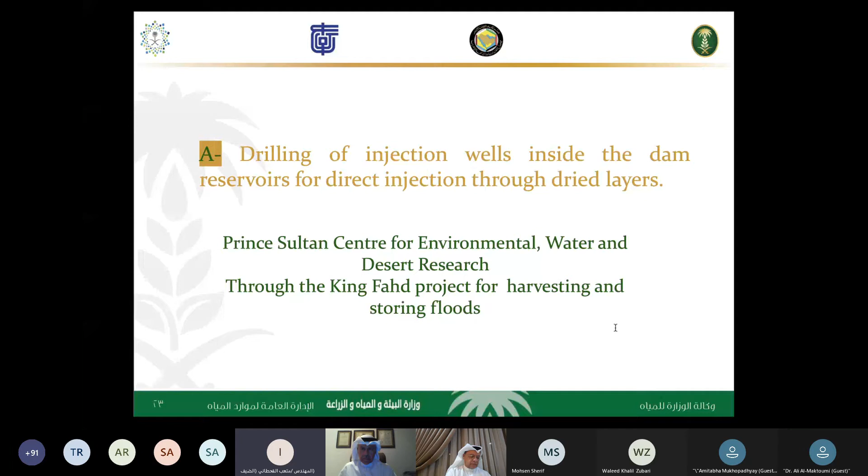This is drilling of injection wells inside the dam. Prince Sultan Center has this experiment within the King Fahd project for harvesting and storing floods in the dam reservoir. Due to the accumulation of sedimentation in the dam reservoirs, this reduces the natural infiltration in the dam reservoir for the wells in the downstream.

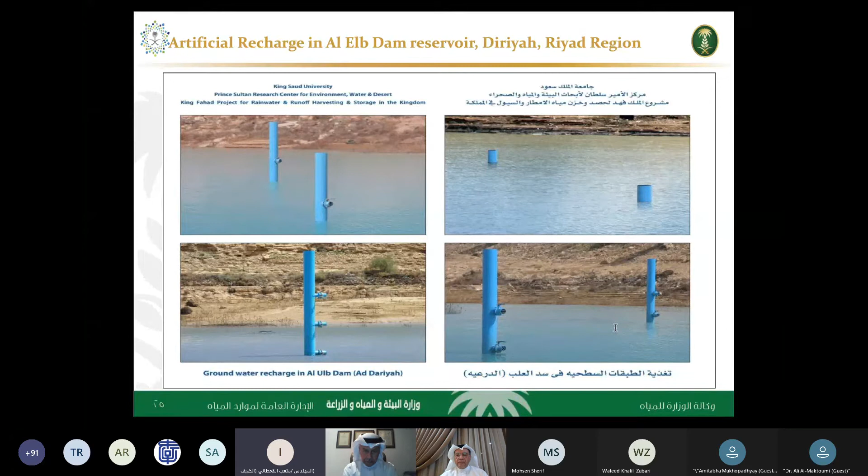So 5 wells are directly drilled in the upstream, in the dam reservoir, which discharge the runoff water, if it is mostly clear, directly to the dried aquifers or alluvium layers. This is a good indication for rising of water level in the farmers' wells in the downstream of the dam.

Next, please. You already got the time, so please. Go. Next, please. Next, please. This is a good experiment. Now, just a minute, please.

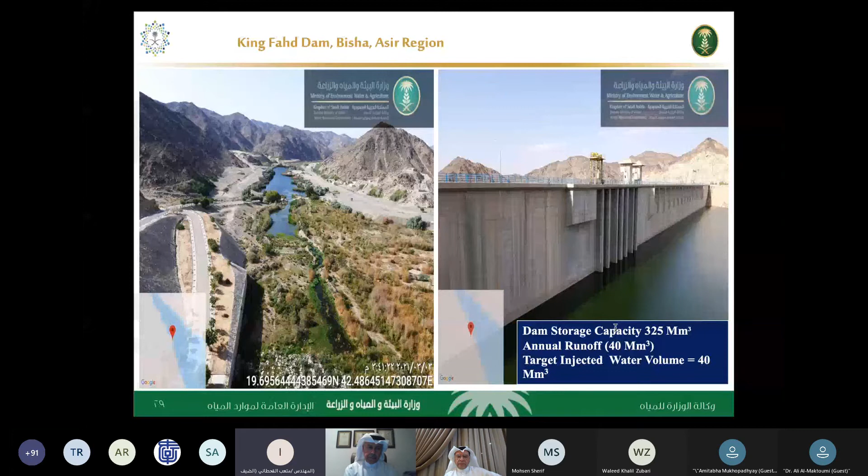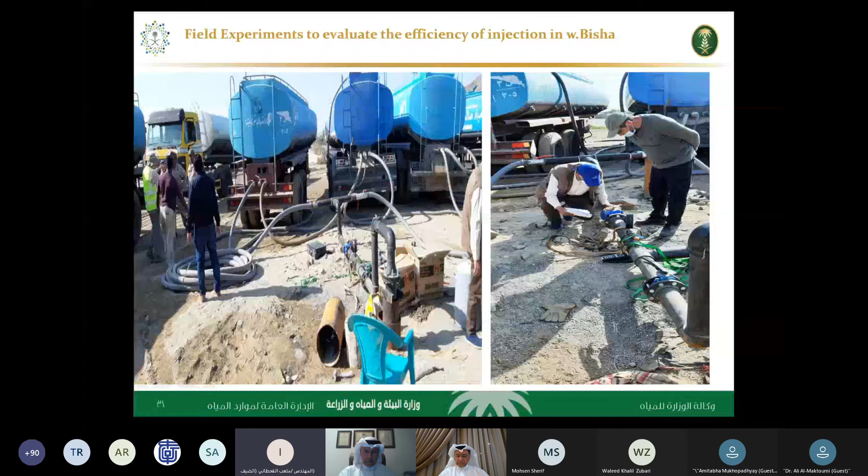We already injected about 2,000 cubic meters per day in one well, and the rising water level in the monitoring well gives a good indication, and this is under evaluation and interpretation. Next, please. This is the tanker and the monitoring of injection wells in the Bisha Asir Dam. This is an injection well. This is a discharge well. Next, please.

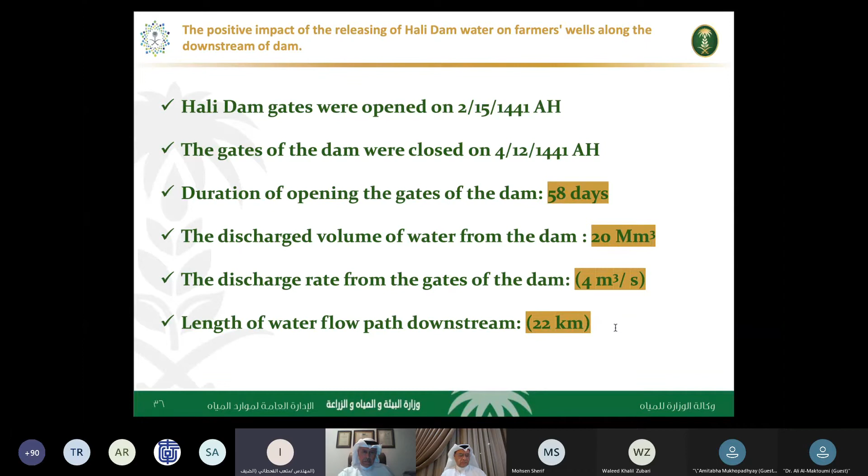This is the advantage: we monitored the water quality in the farmers' wells, where the TDS reduced from 900 to about 820 ppm, and the water level rose about 7 meters in the wells of the farmers downstream of the dam. Next, please. This is Hali. This is the water path, 22 kilometers. This is an indication of water level rising due to the dam releasing. Next, please.

This is a water supply system consisting of a surface dam upstream and the underground dam on the right side, with a well field in between. This is a good example of a water supply system already constructed in Ahseba, where the production attains 12,000 cubic meters per day.

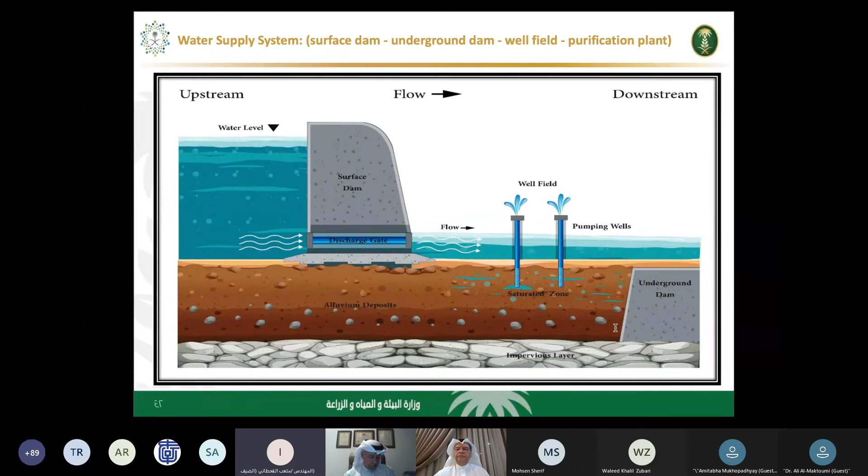Leth dam is under construction. We already have the Leth underground dam and a well field of 13 wells, and this feeds the purification plant with a capacity of more than 25,000 cubic meters per day. This is a good example. Next, please.

This is a Leth underground dam. The third program uses sinkholes and the cavities within the outcrops of some aquifers, mainly in Riyadh and the eastern region. The target is about 22 sinkholes to use as aquifer recharge for this.

Next, please. We have to move faster. Already exceeded the time, and the conclusion.

The fourth program is direct injection using tertiary treated water. We have targeted 4 areas: Wadi Khulais, Wadi Asfan, Wadi Ibrahim, and the Hada Al-Sham plain. Finally, we go to the conclusion.

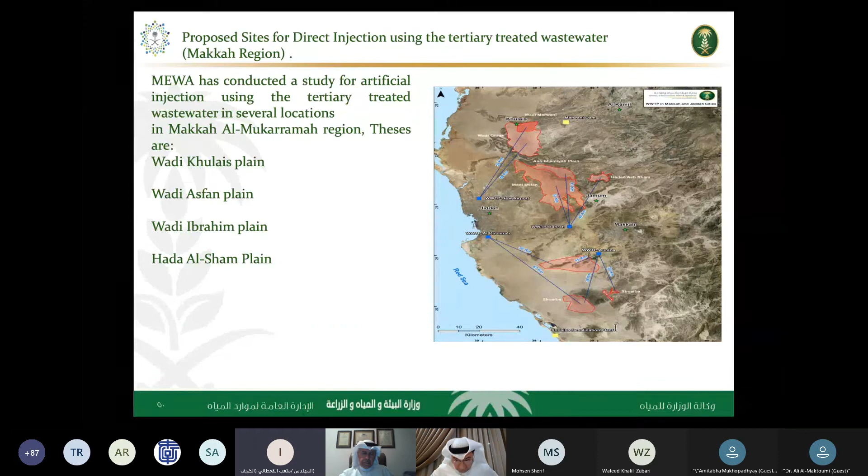The experience of the Kingdom of Saudi Arabia in artificial injection and increasing groundwater recharge is receiving wide attention. The application of desalination water injection experiments is currently being studied in El Mashi, Abar El Mashi, and the Malakan field. A field experiment to evaluate efficiency is already in Bisha, Asir.

Finally, the final slides. This is the program of injection already in dams by Prince Sultan Center for 18 dams. As we said, the tertiary treated in 4 dams. It is recommended to increase the communication between the concerned authorities and the countries of the Gulf Cooperation Council to review, benefit, and exchange experience in this. Thank you, Chairman.

Thank you, Engineer Mut'ab and your colleague, for the informative presentation and sharing with us the Kingdom of Saudi Arabia's experience in artificial recharge. Thanks a lot. And now the table moves to the panel discussion. The floor is all yours, Dr. Mohammed.